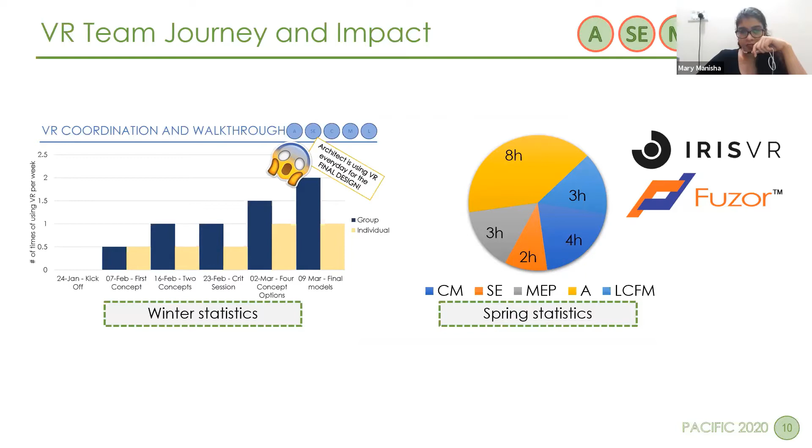Due to the universities being shut, a few of us lost access to VR headsets. Despite this, we used the computer screen version and did well in utilizing VR in comparison to winter statistics. We use VR to conduct walkthroughs with our team and also with our owners. More often, we used it in subgroup meetings to troubleshoot and solve problems and to explain and check the feasibility of our ideas.

Moving on from the team process, first thing we did was the analysis of the site. Our building is located on a site belonging to San Francisco State University and will accommodate their engineering department. In the bigger context, the site is located at the edge of the campus, right next to Lake Merced. Already while being together on site, we spotted a big opportunity to use the view to the lake as an advantage for forming our concept.

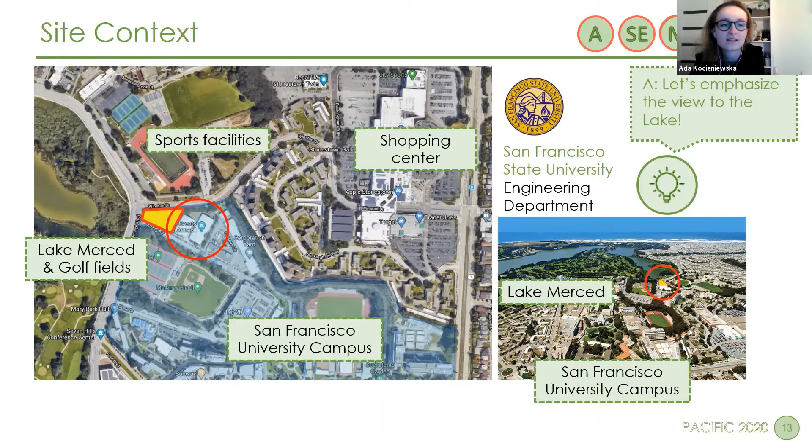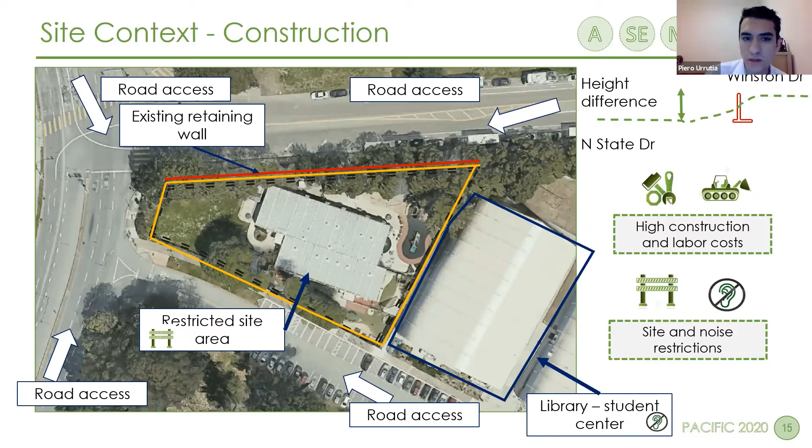In a smaller scale, our site is situated at the crossroad of the main street on the left, Lake Merced Boulevard. During our site visit in January, we discovered a missing pedestrian connection between Winston Drive and North State Drive. There's a height difference between Winston Drive and North State Drive, making the access to the site only possible from the North State Drive. There's also an existing retaining wall on site that we can take advantage of. Also, the Bay Area is characterized by high construction labor costs.

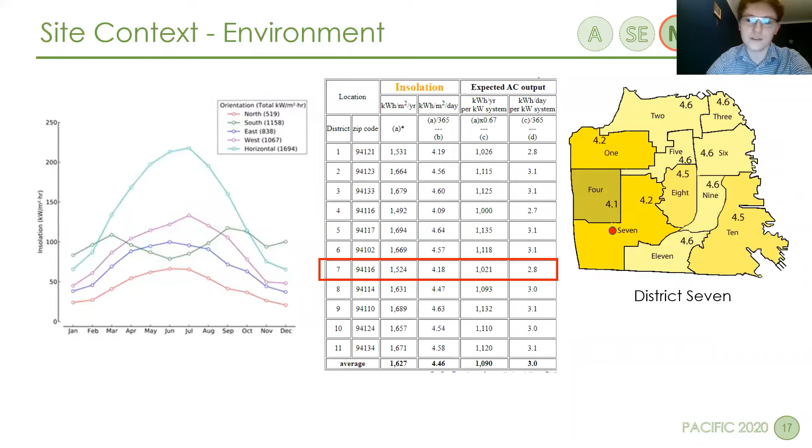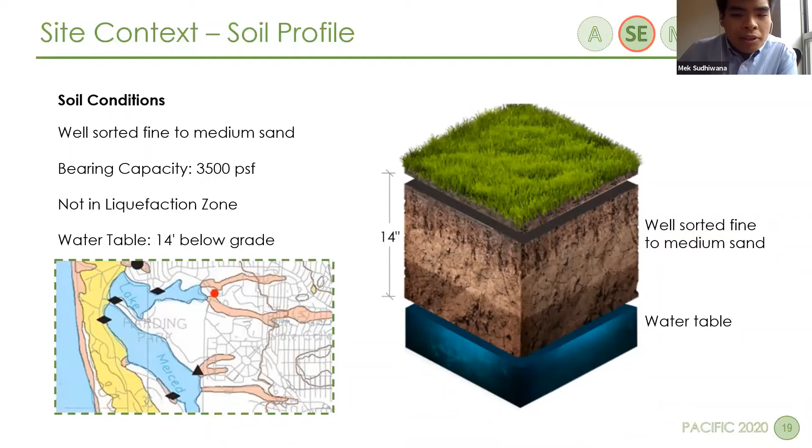Regarding the hazards that need to be mitigated, San Francisco's location along the San Andreas Fault means that the city is prone to earthquakes, and of course the structural system needs to be adapted to the seismic design requirements. As an educational building, which means that in case of failure the risk to human life is high, it is classified as risk category 3.

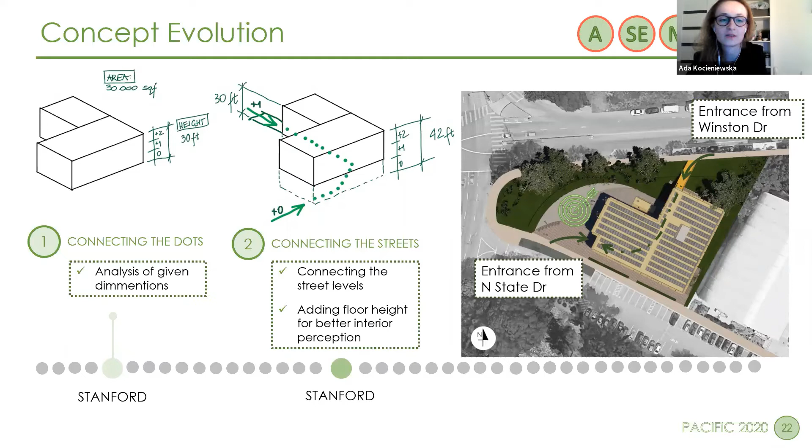The concept from the beginning went through an analysis and a set of changes from winter to spring quarter. The analysis that we did back in Stanford led us to first conclusions of how to connect the dots in order to answer the needs and opportunities of the given site. The first and inevitable connection appeared in the merge through the building between the opposite levels of the adjacent streets. It creates a possibility to increase the height of the floors to gain better interior perception. During the crit, we presented the idea of a kinetic facade for producing electricity from wind. This worked as an innovative idea, but the calculations revealed that this was a rather expensive high-tech solution that wouldn't create lucrative gain for the building and owners.

At the winter presentation, we presented two concepts, both of which represented our user-oriented design focused on using nature for sustainability gain. After the final choice, we made an evaluation of the best aspects of each concept to decide which ideas are the ones to further develop in the spring quarter. The development started with finalizing the input from every discipline to increase the sustainability as well as integration of disciplines in the design. The final outcome of our collaboration is presented in our integrated facade system that each of the disciplines contributed to.

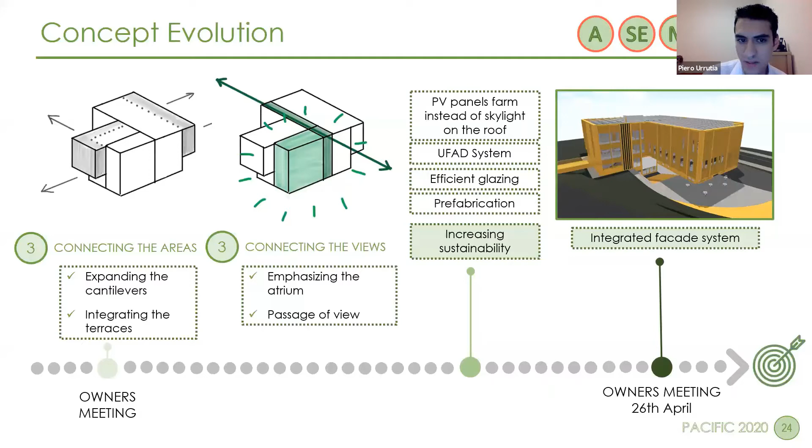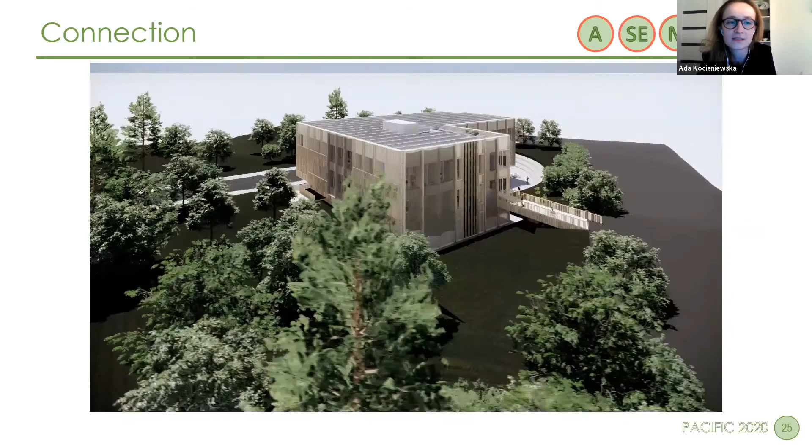Our final design presents an educational building with a user-oriented design that provides an innovative facility for the engineering department. The building corresponds to nature with green walls and blends in with the site due to the use of natural resources. The focal aspect that creates the form of the building is an integrated wooden facade that is crucial for harvesting water from fog and using it for operating the building. The building is accommodated to the sun directions, which creates a well-being atmosphere.

The goal of the project is to implement a user-oriented design to connect occupants of the building with the neighborhood community while designing the facility engaging the collaboration between people. The goal is to be flexible and prepared to adjust to the needs of the user. Nature can be interpreted either as a threat that needs mitigation or as an opportunity. Therefore, it is our goal to neutralize any threats posed by nature while taking advantage of what nature has to offer in a sustainable but also innovative manner.

Data is important for design, construction, and operation. It must be shared among all the disciplines in order to assure the integrity, accuracy, and consistency of it. The team has worked collaboratively in order to assure that the design is ready to be built, operated, and maintained.

The first goal that we addressed in the design was the connection to community, which puts the user on spot. Not only are we thinking locally of the users as university members, but also globally about the contribution to the surrounding neighborhood. To create a sustainable co-living community, the design supports and offers advantages to surrounding as well as daily occupants.

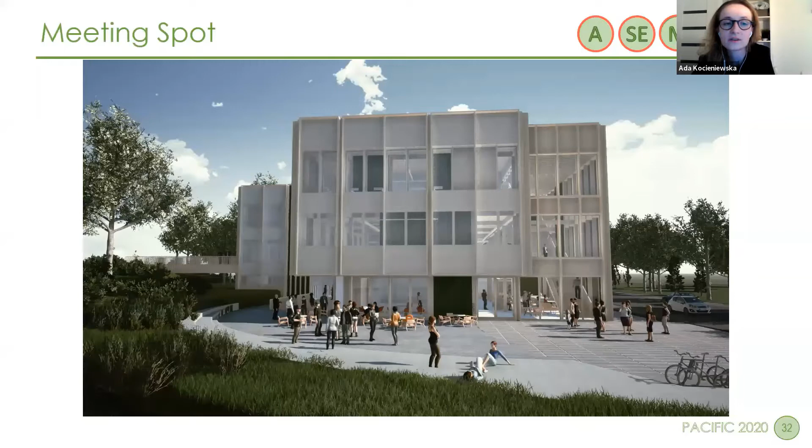We combine the needs of the occupants from owners and faculty's perspective and created a building that connects learning and innovation through collaboration. The day of the future faculty member starts when he enters the site through the main plaza. It functions as a meeting spot and the main outdoor public space.

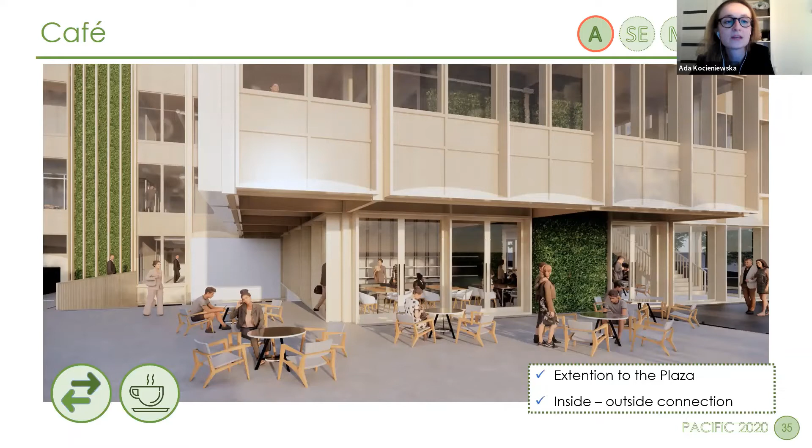Right after entering the building, we've designed a rentable area which can operate as a cafe. A cafe with 700 square feet enables the public to use the building and to gain additional income. During warmer days, the cafe has a possibility to open up to the plaza as an extension of rentable area that connects it to the public space and outdoor meeting spot.

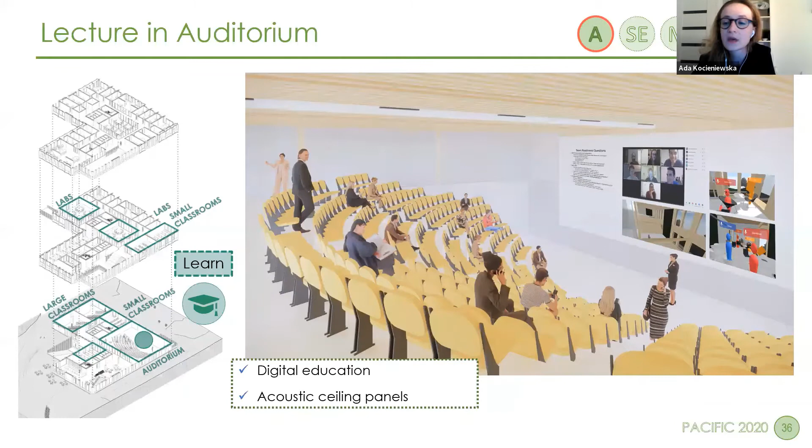The route for the building follows to the auditorium that accommodates the lectures, and it's the biggest area of the building. Additionally, it can be used as a rentable space. The clear visibility is achieved by the terraced audience. Displacement ventilation located on 2 levels was designed to get high thermal comfort in the auditorium. The supply ducts and fan coils are located under the raised floor, while exhaust ducts are placed near the ceiling along the beams.

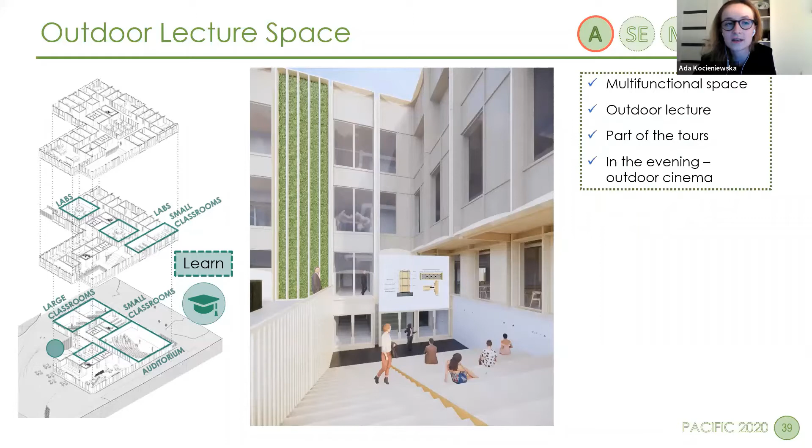The design gives an opportunity to have an outdoor lecture space with the possibility to hang the projection screen. The location of the screen is the most shaded from all the facades, so the lectures can take place both during the day and evening.

Another space that functions as a lecture space are the large classrooms. The same spaces are used here as a rentable area for events and are designed to be prepared for the unexpected. Last month changed the perspective of resilience of the facilities into a whole different picture. As a response to a possible pandemic that might happen, our building plays the role of shelter for the neighborhood, for which the classrooms can be used due to retractable seating.

The advantages of the building for giving shelter are the availability of a kitchen and bathroom facilities, sensors in the building to measure and adjust the air quality, and the building management system which allows to separate the airflow from other spaces. With the fog catcher and the combination of PV panels and Tesla batteries, we can always provide water and energy, also during lockdowns.

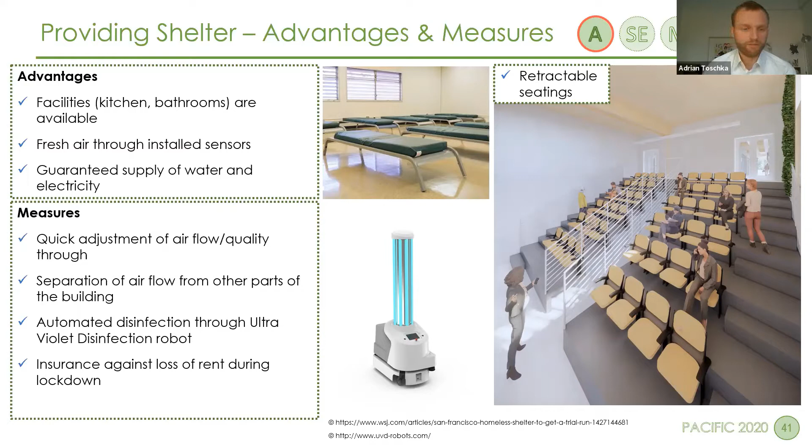To keep the users of the building healthy, we are using an ultraviolet disinfection robot which disinfects the building also in normal waves of influenza. During possible lockdowns, we are insured against the loss of rent. The idea of preparing the quarantine separated from the rest of the building is supported by the fact that both large classrooms could be operated only by the external staircase and at the same time be disconnected from the rest of the building.

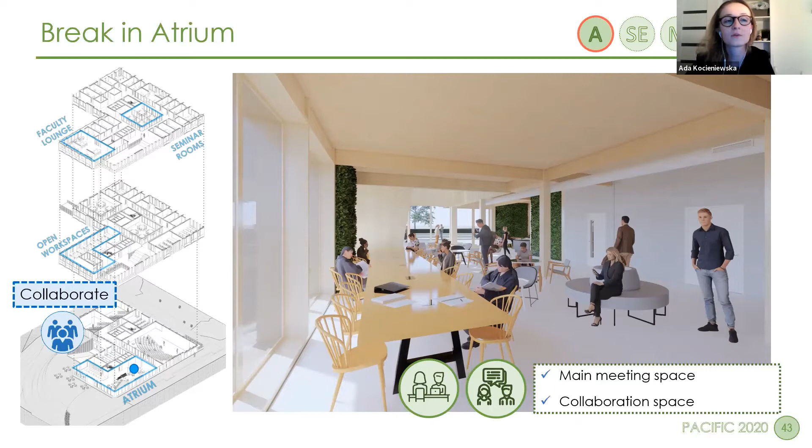Afterwards, we enter the atrium, which is the central place of the building. Not only does it enhance the social connections, but it also could be used as informal collaboration space for individuals and teamwork. The focal point of the atrium is the staircase that is essential as a viewing spot to the Lake Merced nearby.

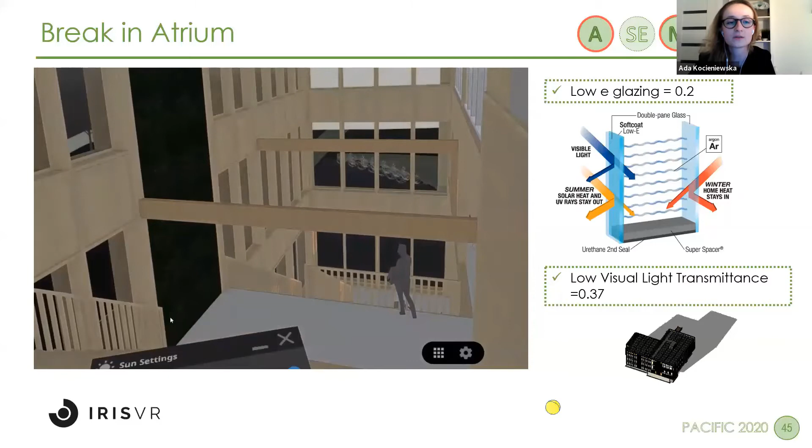To emphasize the atrium from outside and the view from inside, we designed the facade as free from any shading system. To prevent the users from glare effect and overheating, we improved the windows to low E double glazing with a low visual light transmittance. The sun simulation presents how the gray tinted windows stop part of the sun rays from passing through the glazing.

The building is designed to provide not only educational spaces like classes, but also additional areas for collaboration. The western wing of the first floor is fully designated to students' collaboration. It offers multiple options of workspaces, from individual spaces integrated in the facade, through shared team tables, and assigned meeting and conference rooms.

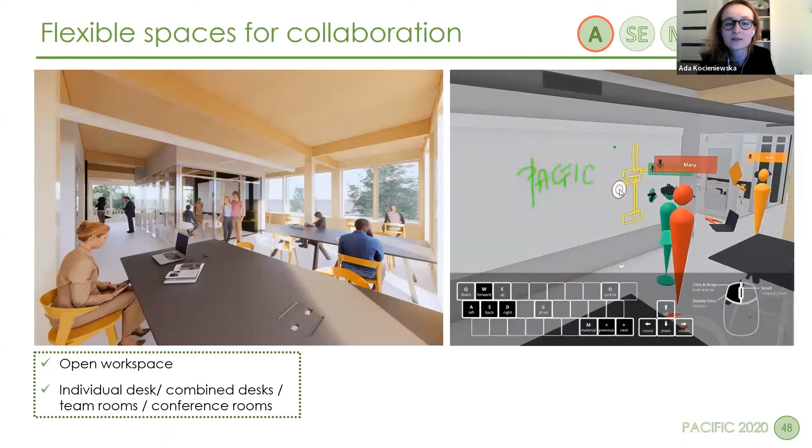The communication area is included as an activated stand-up brainstorming spot, which we checked in VR for our sessions. The emphasis on collaboration in the building is encouraged by the arrangement of spaces. The flexibility to rearrange the seminar rooms from 1 to even 4 makes it possible to adjust them to the current needs and increase the area for usable space.

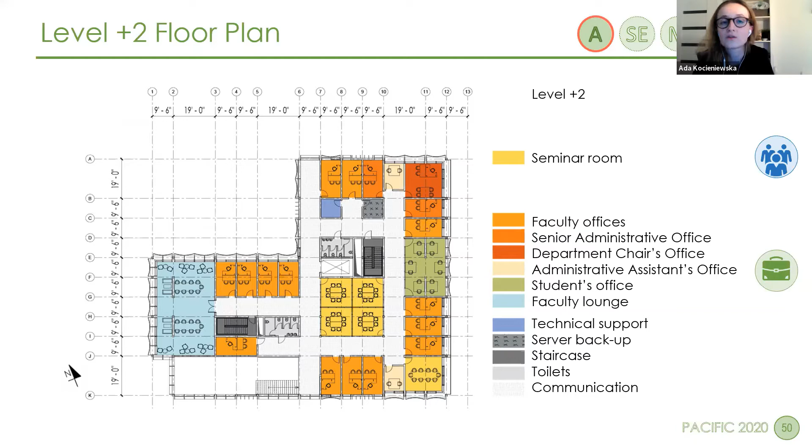The building is designed to enable the connection between students and faculty members due to the mixing of faculty and student offices on the first and second floor. The offices are treated with high attention due to their air and sun conditions. The sun is limited from overheating the rooms due to the setback of the facade and a natural passive cooling system. Additionally, the building is using underfloor air distribution to enhance flexibility of spaces and temperatures.

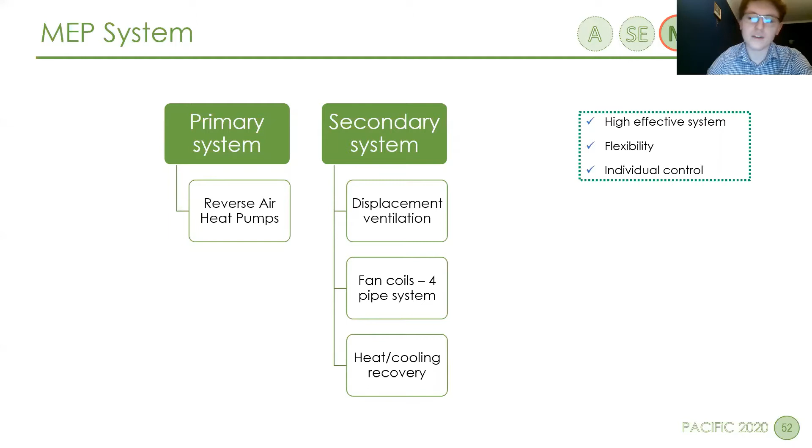To design a building with high efficiency, we also need an efficient ventilation system. For the primary system, we have the reverse air heat pump, while for the secondary system, we have displacement ventilation with fan coils, a four-pipe system, and a central air handling unit with heat and cooling recovery. The reverse air heat pump was chosen because of its ability to efficiently heat and cool the building by only changing the flow inside. It also does not emit any CO2 and has low operating costs because it is powered by our PV panels.

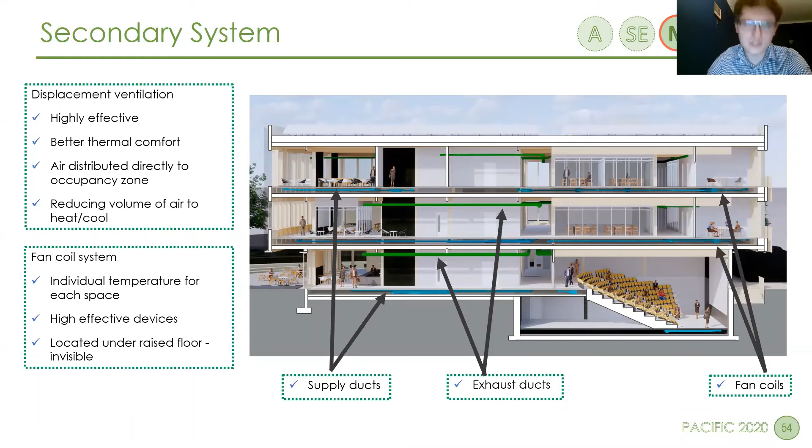The benefits of our secondary system are that it can provide an individual temperature at each space, which can be controlled by temperature and CO2 sensors, which can reduce heating and cooling loads because air with the desired temperature is distributed directly to the occupant zone.

The second objective of our design is the connection to nature, by creating a structure that is able to recover quickly from natural hazards, but also a building which benefits from what nature has to offer. So, addressing the earthquake challenge, we need to control our structure's response to it, and at the same time minimize repair and downtime costs. Therefore, the team aimed for a resilient but also sustainable structure. Glulam columns and beams form the structure's framing system, which is supplemented by CLT panels with 1.5 inch of gypsum topping as a fire protective layer. Moreover, CLT rocking walls are used as the lateral resisting system.

So in order to understand how the rocking wall system is related to resilience, let's first explain its basic mechanisms. During an earthquake, the wall rotates but doesn't bend, and thus the damage on the wall is minimized. However, the damage is still there, but is confined to replaceable Krawinkler fuses, which provide the ductility to the system and the resilient characteristic, making the building serviceable after an earthquake event. The self-centering capability is provided by the post-tensioned steel rods, which extend the entire height of the building. Since the damage is concentrated in the fuses, the rods remain elastic during the rocking motion.

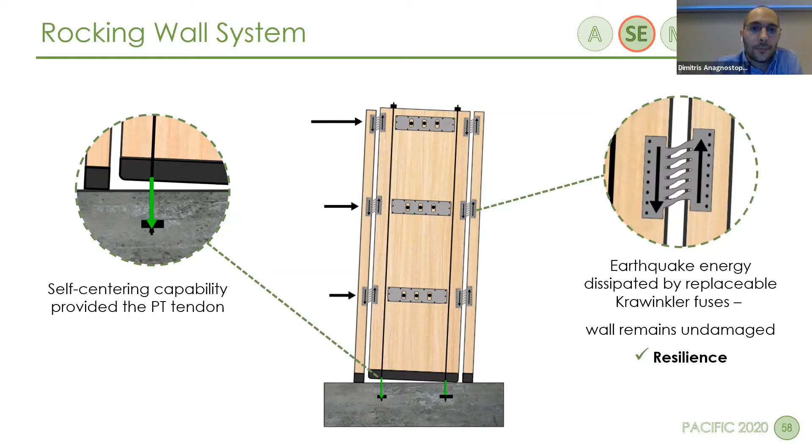The connection to the diaphragm and also the shear transfer is implemented with round pins, which are connected to the CLT panel at each level and extend until the surface of the wall. As the wall rocks, each pin moves in the vertical direction inside the slotted hole. The dimensioning of the slotted hole depends on the maximum vertical displacement of the wall during an earthquake, and it's attained by the nonlinear dynamic analysis, which will be introduced later.

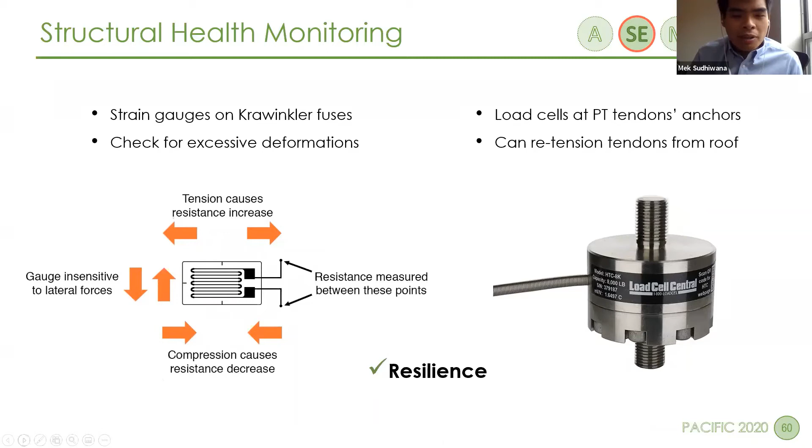To further improve the rocking wall's resilience, the team will be implementing structural health monitoring by placing strain gauges on the Krawinkler fuses and load cells at the post-tensioned tendon anchors. These devices will be connected to a central system and a digital twin, which will be explained later. This allows operations and maintenance to know when to replace which fuse and if a tendon needs to be retensioned.

We are transferring the biggest natural hazard of seismic activity with landlord insurance, and we discovered that to get this type of insurance, it's mandatory to have the rocking walls. Our landlord insurance covers the costs for reconstructing the building after an earthquake up to $5 million, and it also covers the loss of rent during reconstruction.

Since we have a restricted site, the use of mobile cranes is not possible. Hence, we have evaluated 2 cranes for our site, the tower crane and the crawler crane. The final decision leads to the use of the crawler crane because it is more flexible, easier to install, carries more capacity, and it's movable, especially for the installation of the rocking walls. Since they come full height, 42 feet tall, the tower crane must be at least 100 feet tall, whereas the crawler crane with the luffing jib doesn't need to extend its boom or jib length.

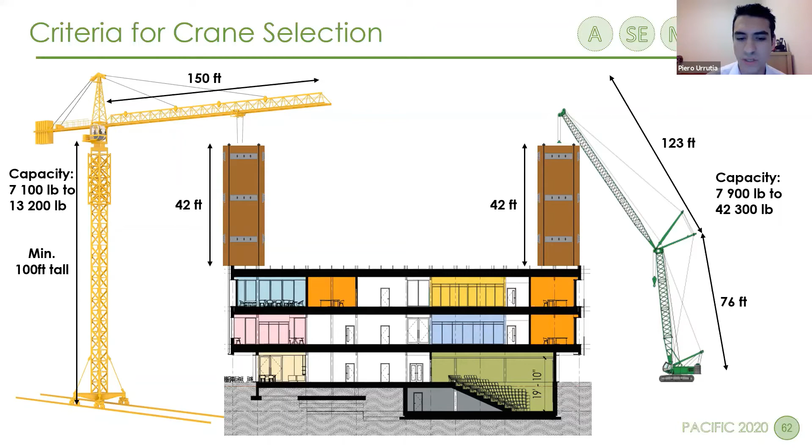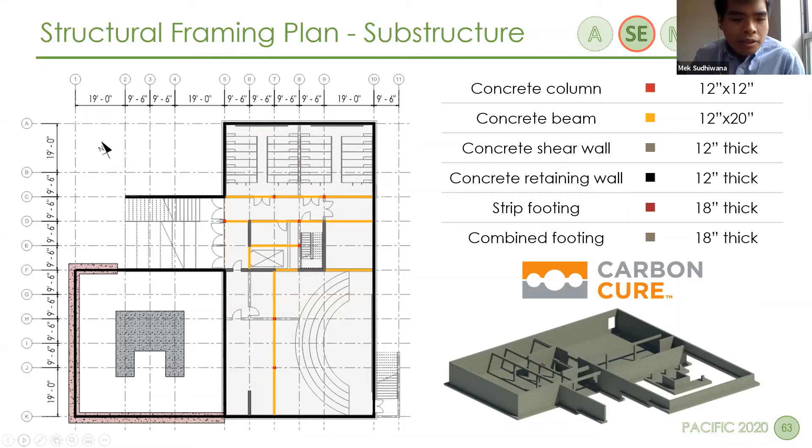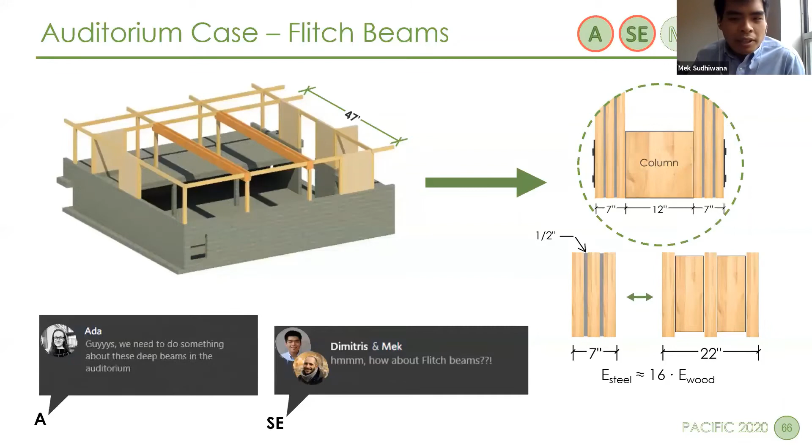Here's the structural framing plan for level 0. The SEs and CMs collaborated with the architect early on to have regular grids and standardized structural members. The largest challenge on this level was the 47 feet span of the beams above the auditorium. And the team's solution was to use flitch beams and double beams. The steel plates increase the strength of the beam, while the wood prevents the steel plates from buckling. And also having the double beams reduces the load carried by each beam.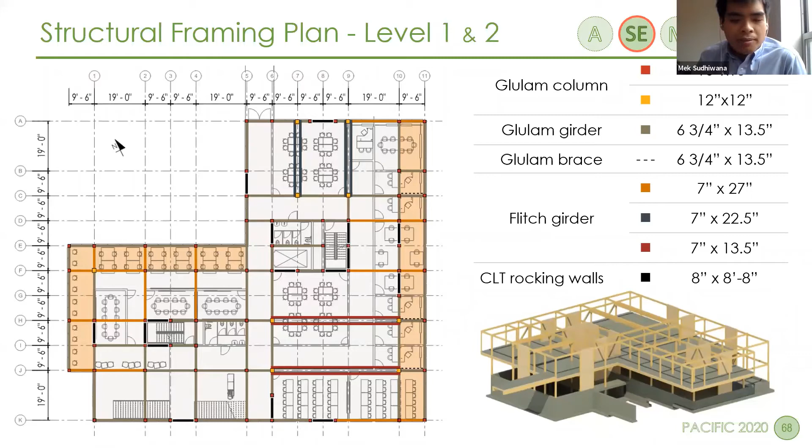As said before, SEs and CMs have collaborated with each other in order to design for constructability. This is shown on the standardized structural members selected. In addition, we have optimized the layout for the CLT panels, in which we have only 4 different sizes. This has been possible due to the standard grid size from the very first concept.

Here are our typical connections. We're using a concealed knife plate for beam-to-beam and beam-to-column connections. Not only is the concealment beneficial for aesthetics, but it's also good for fire protection. For the column-to-column and column-to-concrete connections, we're using Rothoblaas's pillar. And unlike in the detail shown here, chemical anchors will be used for the column-to-concrete connection.

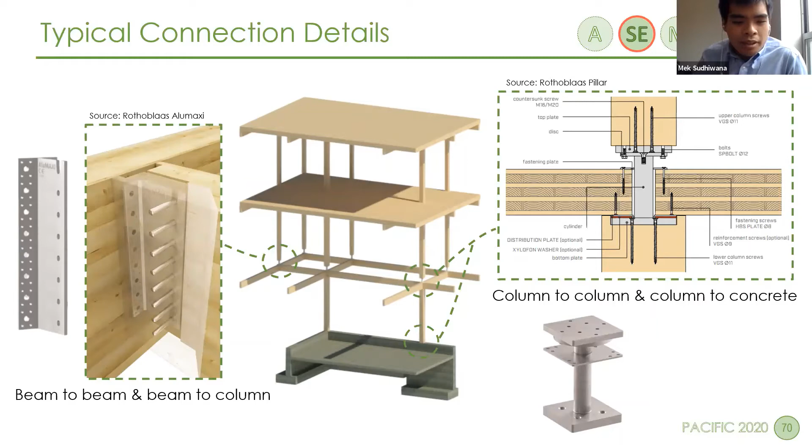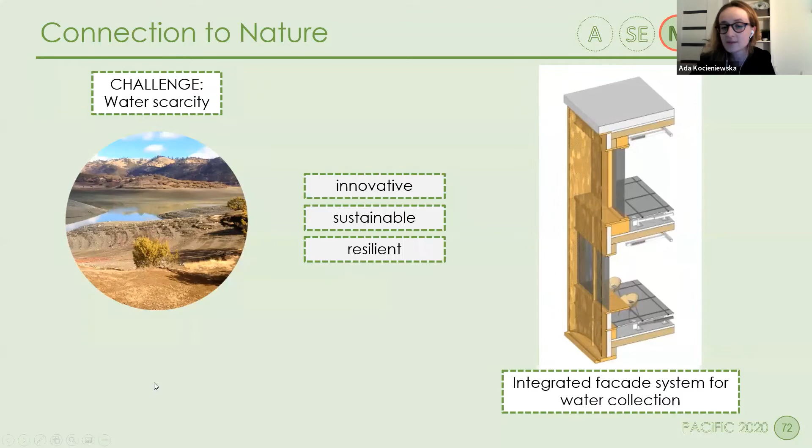Due to the fact that water scarcity is a rising problem in California, we have introduced systems that support production of water from one of the most common phenomena in San Francisco, which is the fog. Our design is enhanced by the fog catchers integrated with the facade. Based on the study of a research group at MIT and the fog collector producer from Germany, we've decided to use a polyethylene mesh.

The research group proposed an efficient system from stainless steel, but though it was more efficient in terms of water harvesting, the cost of production and much higher weight disqualify it from being a better option in the long run. The water is collected on 2 layers of the woven mesh covered by substances that firstly ensure that small droplets easily slide down into the collecting gutter integrated with the facade mullion, and secondly, prevent the mesh from being covered with microorganisms.

The irrigation system is attached to the columns of the facade and brings the water through pipes to 2 water collectors located underground on site. Due to maintenance, the fog catcher modules are clipped into the modules of the wooden facade and are mounted with profiles. The windows behind the fog catchers are openable to enable cleaning.

A majority of fog catchers are located on the west and north facade because the wind can increase their efficiency. One of the biggest advantages of the fog is that it occurs almost every day during mornings and afternoons, so our device can work for the whole year.

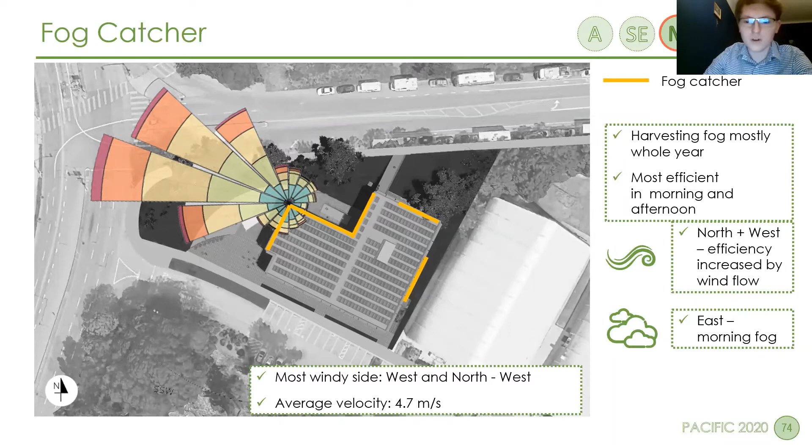The adoption of the fog catcher idea combined with rainwater and greywater collection allowed us to reduce water consumption by 80%, as the fog catchers were able to collect more water than both rainwater and greywater collection. The fog catcher can be used not only for harvesting the fog, but also as a shading system.

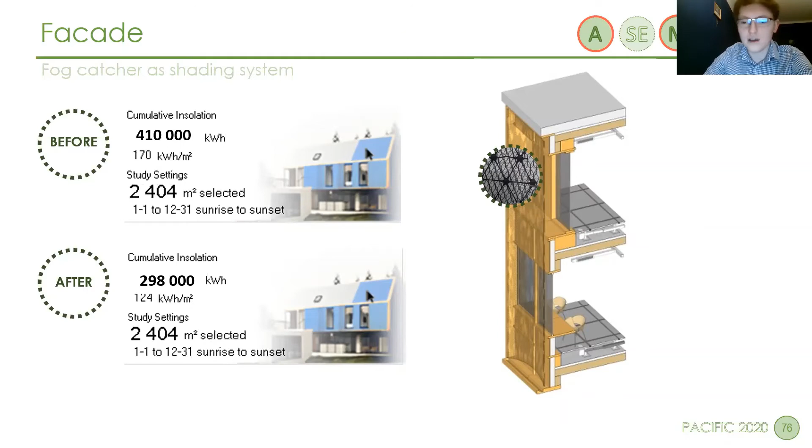We performed an analysis which showed that the system allowed us to reduce the insolation in our building by 27%, which greatly helped us reduce cooling loads. To provide building efficiency and choose the most prominent placement of the shading system, we did a shading analysis which shows that the most sunny facade will be located on the south side.

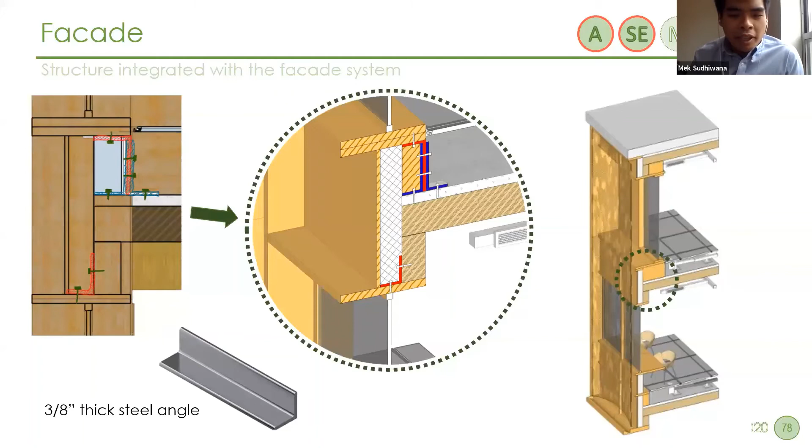To reduce the sun's impact on the cooling load and also to prevent glare, we chose glass with low-E and visual light transmission value on this part of the facade. During the subgroup meeting between the architect, SEs, and CMs, a connection detail for the facade modules was prepared in a way that is structurally sound, easy to construct, and does not negatively impact aesthetics. The blue elements were initially attached to the structure, while the red elements were initially attached to the facade module.

The installation of the facade will consist of having first the structure ready, then the installation of the facade modules, and then after that, the facade is installed on the floor below and the floor above. We can install the facade finish in between the floors. Finally, the fog catching net is attached and clicked into the facade.

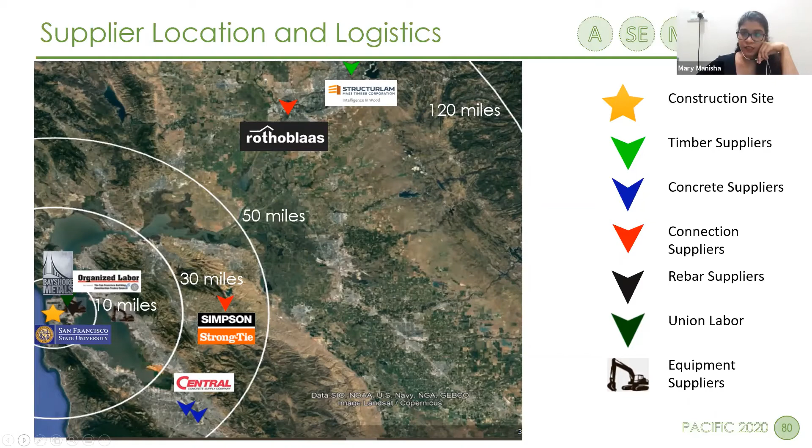Considering the structural system of the building, the following suppliers have been identified, and the raw material timber would be sourced from Canada, whereas the connections would be mainly from Italy. We then evaluated the possibilities of prefabrication with 3 elements. The facade module with the fog catcher was a major component, but the risks associated with this were very high. Due to the combination of fog catcher and the facade, there were waterproofing issues and rework necessities.

The whole structure is made of industrialized glulam beams, columns, and CLT panels, as explained earlier. They have been made to standard sizes wherever possible, which led to the optimization of freight, thereby leading to lower emissions. These industrialized panels are pre-assembled at site with the connections. The risk associated with fire rating is mitigated by using fire rating paints, and the risk of phytocontamination during transportation is mitigated by individual packing and by using a hydraulic boom or pressure wash.

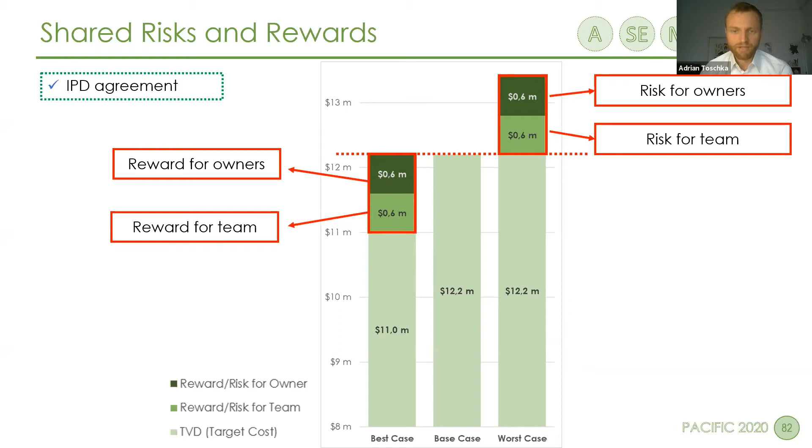Installation of bathroom pods is cost neutral, but has a higher risk with regards to MEP flooding and earthquakes as the structure has a raised floor system. Due to an IPD agreement, we implemented a risk and reward concept regarding the target construction costs from the TVD. The graph shows that we share a reward of $1.2 million with the owners in the financial best case scenario, respectively a risk of $1.2 million in the worst case scenario.

To track the prefabricated components, active RFID tags were installed at the fabrication yard after the quality testing of elements. Then the data is mapped. These are geotagged to enable logistics tracking, and after arrival at site, these are inspected and quality checklists are tagged, and data is stored and used to track materials to enable just-in-time deliveries. It also enables an efficient billing system.

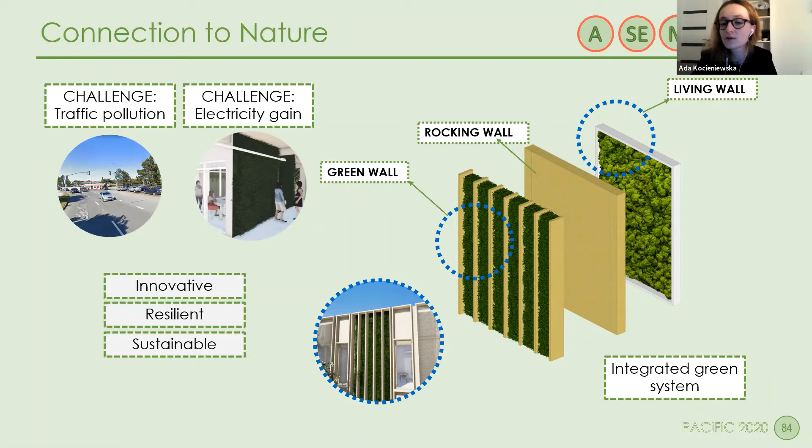To face the challenge of polluted air next to our site caused by traffic, we introduced an inside-outside integrated green wall system based on the rocking walls designed on the perimeter of the facade. From outside, it cleans the polluted air and contributes to decreasing the amount of CO2 in the air. It is watered by moisture and humidity of the air. From inside, the system is covered with living walls. From photosynthesis of moss in specific soil conditions that enhance the harvesting of electrons, it generates electricity for plug load.

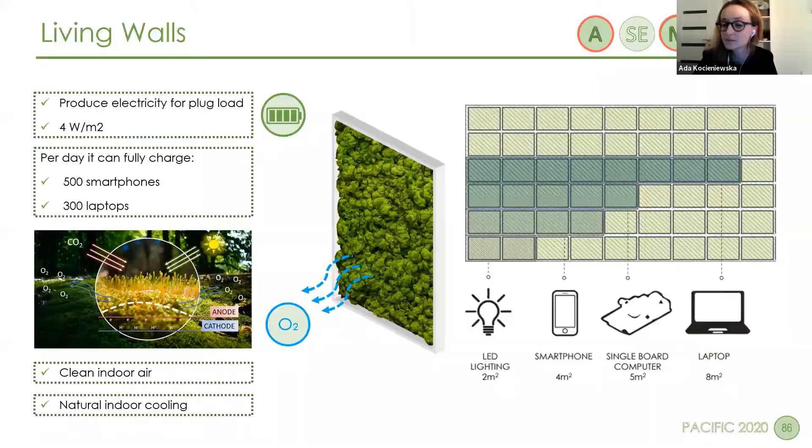Based on the average capacity of the battery and its need for power, we calculated that the amount of living walls in collaboration spaces lets us charge either 500 smartphones or 300 laptops a day. Apart from generating electricity, the system creates pure air conditions as well as natural cooling. To fully use the natural resources given on site, we also want to use solar energy. To do this, we designed a PV farm on the roof.

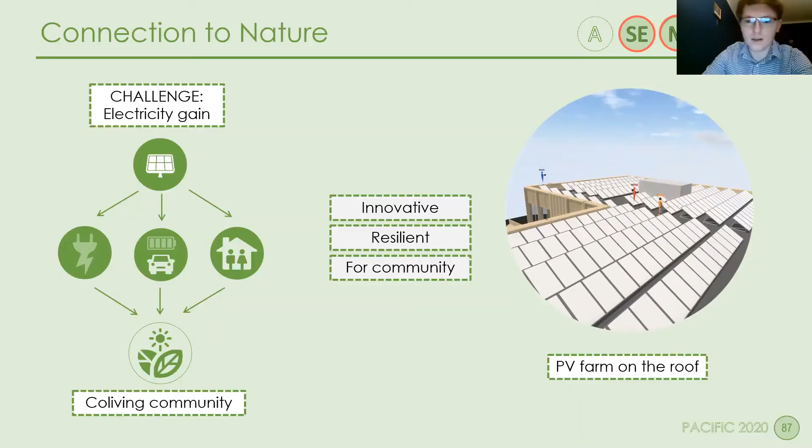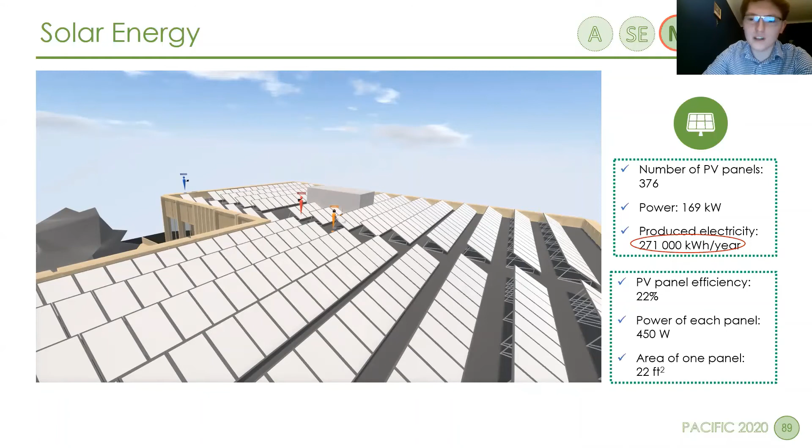To choose the proper location and orientation of the PV panels, we made the solar analysis in Revit. According to this analysis and diagram of insolation, we located PV panels on the roof and oriented them to the southwest direction. As we can see, the roof has enough space for 376 high-efficiency panels with power of about 170 kilowatts. For the whole year, it can produce about 270,000 kilowatt hours.

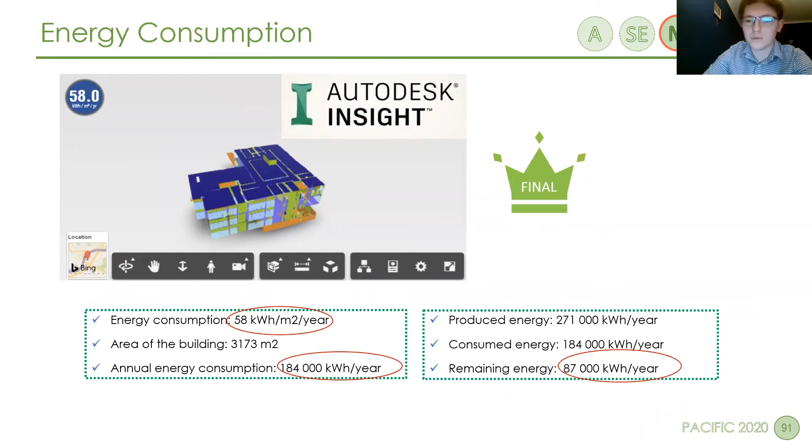Comparing that to the amount of energy produced by the solar panels, we are using 32% less energy than we are producing. But what to do with the additional energy? Our proposition is to give one part of it to the university community as free energy for charging electric cars. It can encourage people to change their vehicles to greener ones, which will be a climate-friendly process because of less CO2 emitted to the atmosphere. The rest of the extra energy will be given to the neighborhood in case of blackout.

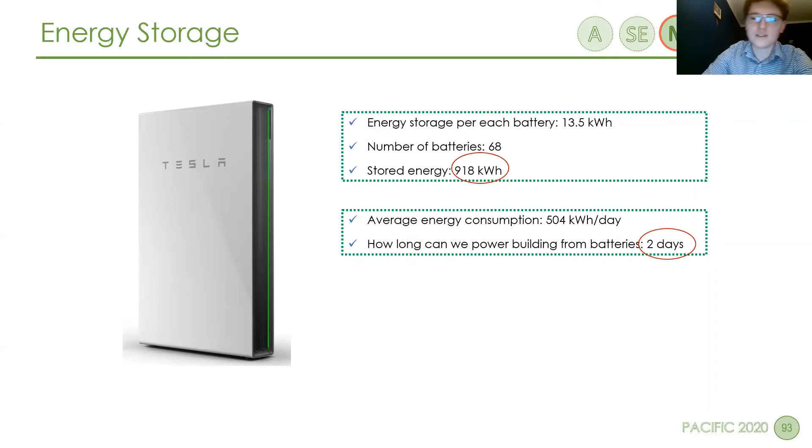Since our building is only using energy that we produce, there are concerns about if the panels get damaged. To address this, we have Tesla batteries in our building that can store enough energy for about 2 days, which will be enough time to fix the PV panels.

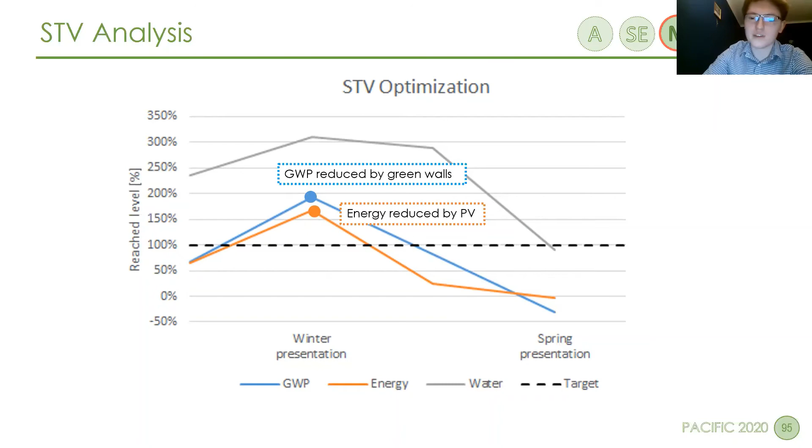Finally, we can perform our STV analysis. Our team met every target and we're able to reduce our water consumption by 80%, which is very good with the water problems in California. We're also able to have our building be carbon and energy negative. Here, we can see the history of our STV analysis. As mentioned before, water is our largest challenge, and we're able to improve every category by using nature, rainwater, solar energy, and moss in green walls.

However, we also want to give the owners the possibility to assess the different concepts with intangible aspects in the value for money analysis. In this value for money analysis, the first 4 rows show intangible assets of the different concepts. To relinquish the PV panels, batteries, and fog catcher would mean to lower the service for the public, to have a low educational purpose, and to be less resilient.

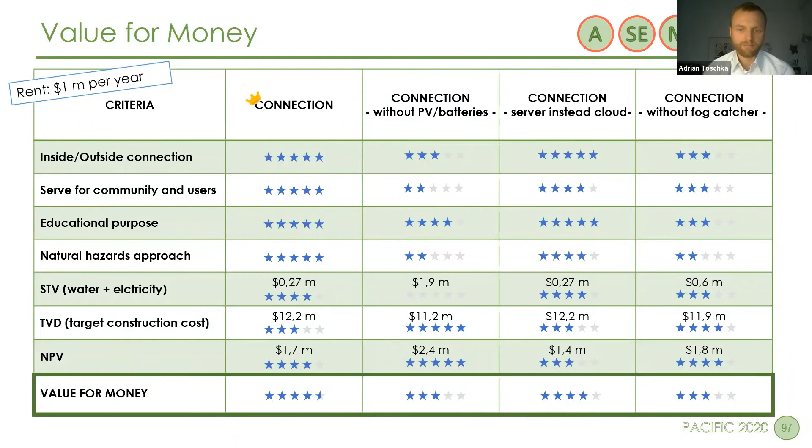From a quantitative point of view, especially the relinquishment of PV panels and batteries shows a huge contradiction with having the lowest initial costs, but at the same time the highest STV in terms of need of electricity. In conclusion, the building with PV panels, batteries, fog catcher, and cloud service has the highest value for money, considering tangible and intangible assets. Data is used across all the disciplines and will become an important aspect for the use of the digital twin.

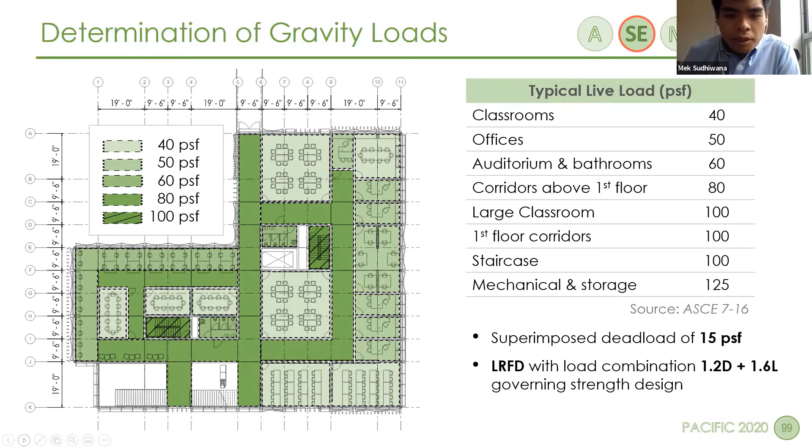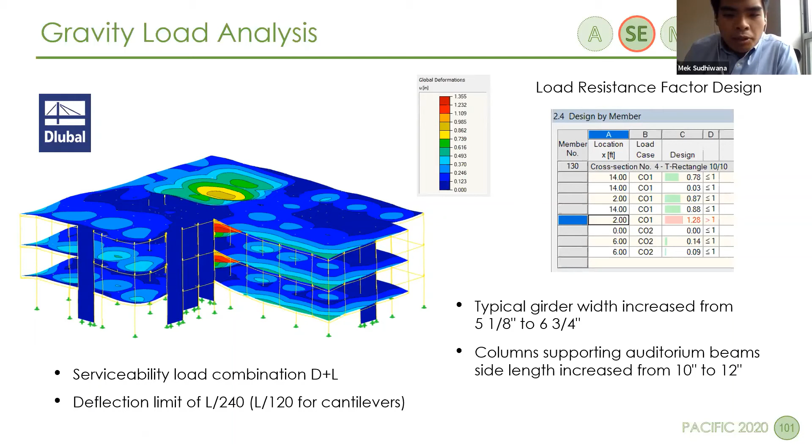The structural analysis and design of the building, apart from the rocking walls, was done in Dlubal's RFEM, a 3D finite element analysis program. The team verified that there were no serviceability issues based on the deflection limits from the IBC and used the load combination dead load plus live load. The strength requirements were checked using LRFD and resulted in the typical girder width increasing from 5 1/8 inch to 6 3/4 inch. And the side length of the columns supporting the auditorium beams was increased from 10 inches to 12 inches.

The results from the modal analysis showed that in the first two modes, the translational modes are the fundamental ones, whereas the third mode is torsional. A low-rise building like our structure experiences mostly the first two modes, therefore the location of the rocking walls strengthens

the building's torsional resistance. Here you can see the lateral load path of the same frame. The load creates a tension load to the external right columns of the frame, then it's transferred to the rocking walls and columns and ends up to the foundation.

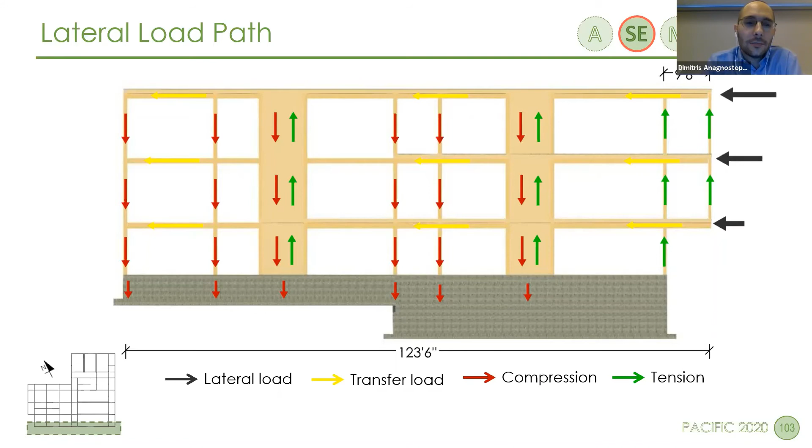For the tendon, first we created a material with a bigger elastic region than the fuses and then simulated the tendon as a load. Regarding the uplift movement, a gap support element was used, which is very stiff in compression but has no stiffness in tension.

The nonlinear time history analysis was implemented on the southern frame of the building. For that, 7 ground motions were selected and scaled according to the design response spectrum obtained by the site class and the risk category of the building. The procedure on selecting the appropriate ground motions for this structure was based on the fact that low-rise buildings are affected more by earthquakes with maximum acceleration at high eigenfrequencies.

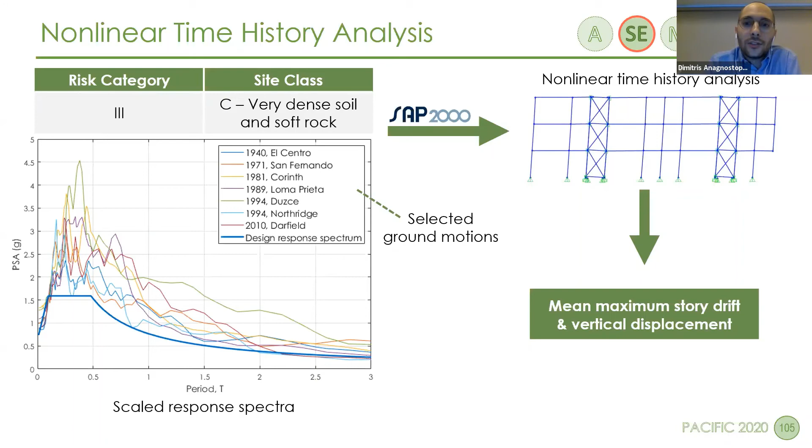And in this video, we selected to show the Loma Prieta earthquake and the response of the southern frame, including 2 rocking walls. Here, the rocking motion of the wall is visible. And as you can see, the maximum displacement is noticed on the top right node, and it's 3.75 inches.

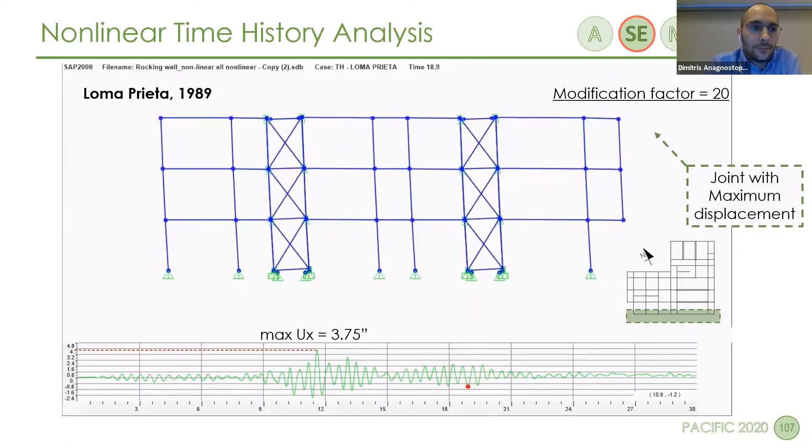We have used an SL framework in which we review the planned schedule that ALICE creates with a logistics model in Fuzor. This framework helps us identify the bottlenecks and reduce the potential risk of having delays during construction. ALICE helped us identify the maximum crews that the project can have. If we decided to have more crews than that, the project duration won't be affected. This is called the infinite resources.

However, because of labor and the space constraints, there is a practical maximum resources that the project can use. We have selected a schedule with the practical maximum resources in which the project duration is 246 days and the total construction cost is 12 million.

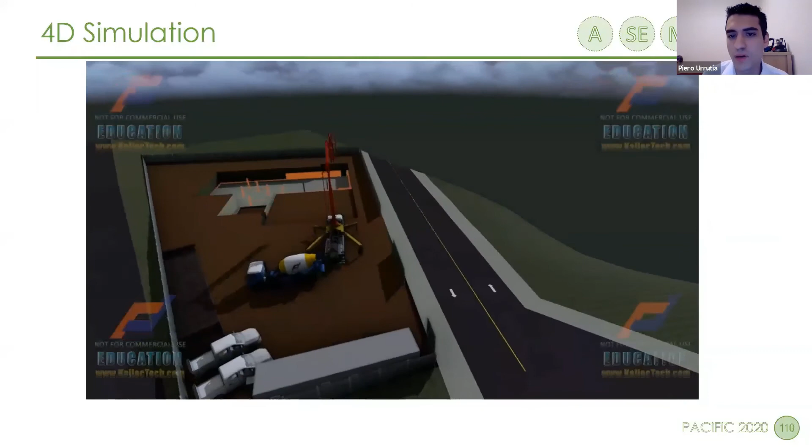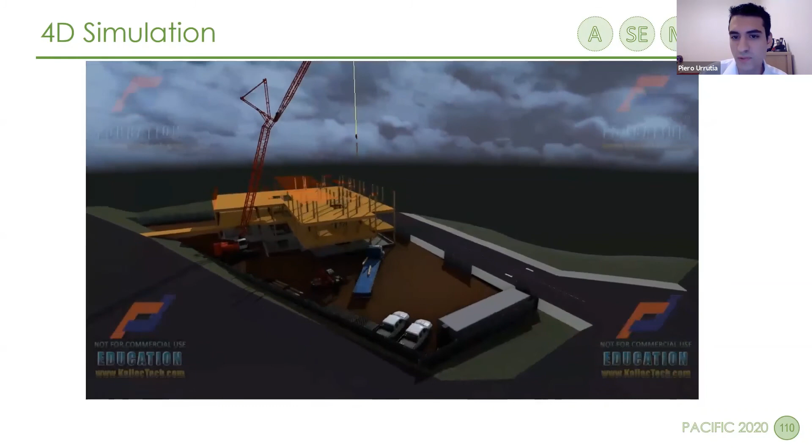With the results of ALICE, we have modeled a 4D simulation, including logistics. In this simulation, we show how the building is built and what equipment is required at what time. It also shows if there will be any conflict between equipment. The simulation has shown us if it's feasible to install the crane and also the maximum length of the truck that can enter the site.

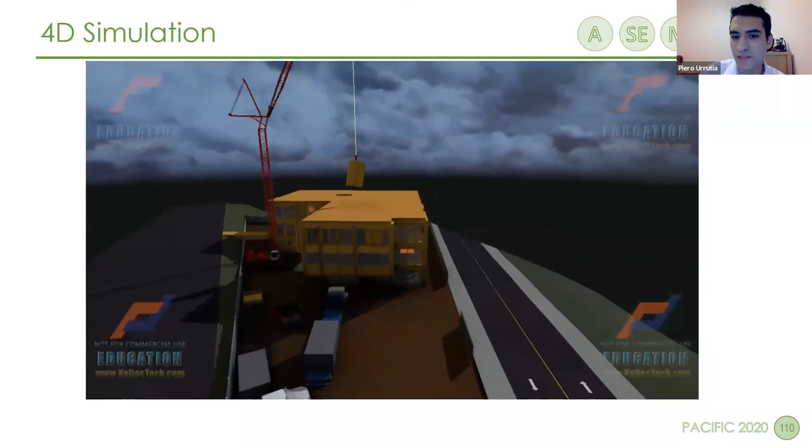The main equipment is the crane, which is used since erection of the level 0 until the installation of the facade. Trucks come and go, delivering materials such as columns, walls, beams, and slabs. With the results of ALICE and the 4D simulation, we have identified a logistical bottleneck.

In this simulation, trucks are delivering the facade modules and interior work materials. For the crane to always be working, there will be facade modules on the material laydown area when the trucks carrying the facade are not on site.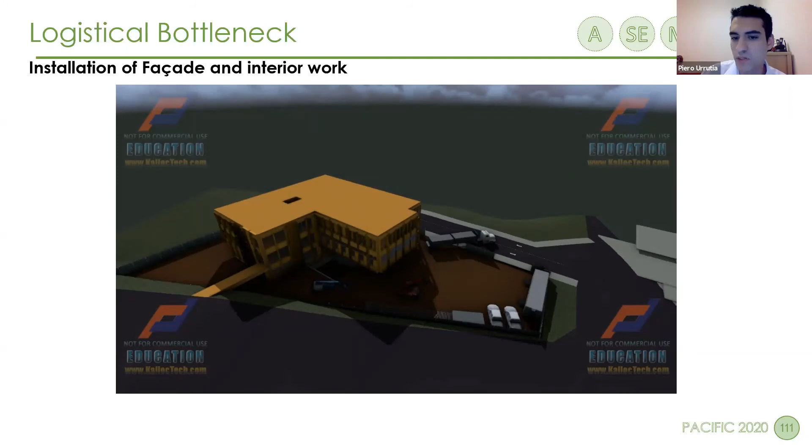Besides this, after the installation of the facade module, there is a facade finish that must be done with the telehandler. However, because of the space constraints between the telehandler and the crane, this must be done at the end of the installation of the whole facade, where the crane is dismantled and carried out of the site. When the truck with interior work materials comes, the telehandler must move to another position.

As we have seen in the logistical bottleneck, the practical maximum resources would cause delays from a logistical point of view. As a result, the duration will not be as expected. We have decided to take into account those delays and use a less aggressive schedule.

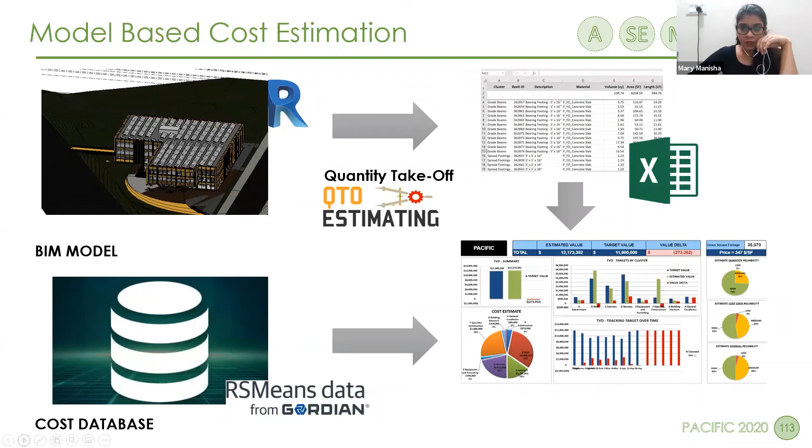The result from this is a project duration of 300 days and a total construction cost of 12.2 million. We used a model-based cost estimation to obtain and update quantities according to the model, and then used a unit cost database to link the quantities to the prices and finally create the cost estimation. With this data, we use the TVD spreadsheet to keep track of our targets and also make updates to the design according to the TVD.

A cost tracking is illustrated here. Initially, the cost estimations were based on both the model and a few assumptions. By 23rd Feb, we managed to estimate it based on the model, thus increasing data reliability. But a week before the winter presentation, as explained earlier, we scrapped our wind facade idea and replaced it with a fog catcher facade. By the winter presentation, we increased the area of facade, which resulted in a rise in total costs.

We then started to evaluate different options for the facade, whether to have it as a standalone option. Then a final decision to integrate the fog catcher with the facade was taken, and the rocking walls were converted to green walls, thus resulting in a surge again. Later, Tesla batteries were added to meet our project's goals of giving back to the community and connecting to nature, resulting in a final estimate of $12.2 million.

Major cost fluctuations were observed in shell, services, and specialty construction categories. Shell costs were increased when compared to the winter presentation due to the evolution of our design. There was a rise in services costs due to the addition of Tesla batteries and the setup. Specialty construction costs surged due to the conversion of rocking walls to green walls and due to the fog catcher facade. All these resulted in us exceeding our target by around $300,000, which still makes the project profitable in the long run, as it would reduce life cycle costs, especially water and electricity.

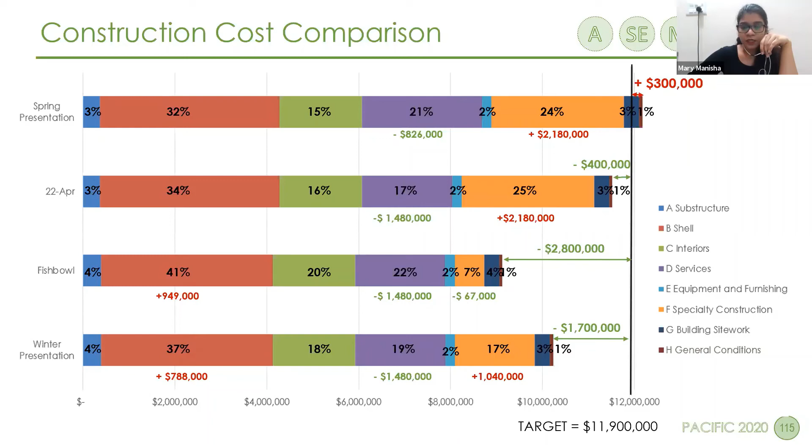To sum up our work, we would like to show that our building scored 81 LEED points and earned the LEED Platinum certification. It means that our building is friendly for both its occupants and environment.

Other risks than the before mentioned CapEx overrun, for example, act of nature, liquidity, construction, or operation and maintenance risks, are addressed by different risk strategies. The main risk measures are avoiding by using software or fixed interest rates, transferring by using insurances or obliging construction companies to take the responsibility for specific risks, and mitigating by the use of a digital twin of the building. The right bubble graph shows the effectiveness of our risk management, and only the risks we are responsible for.

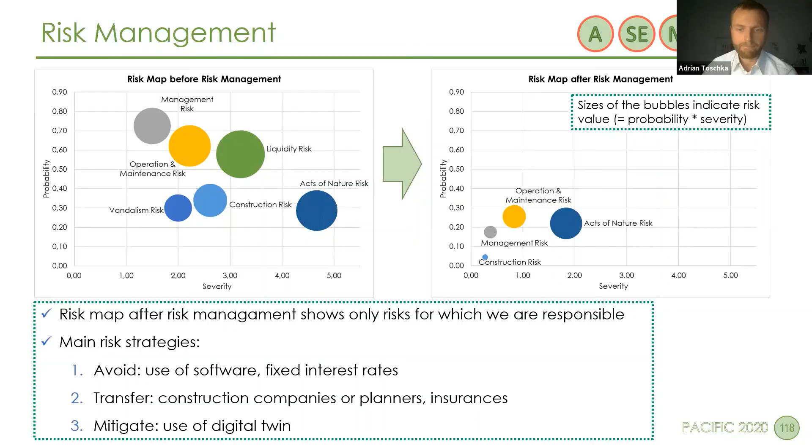We've prepared a summary of challenges addressed in this year's edition. We are answering the resilience challenge with multidisciplinary solutions that create a building ready for the unexpected. We collect the natural resources given on site, we store them, and we share them with the users and surrounding community. Through the structure resilient to earthquakes, thanks to rocking walls and sustainable materials such as CLT, we create a shelter in case of an earthquake, and together with the green walls integrated system, we reduce the CO2 footprint.

To answer the demand of the water shortage, we collect water from fog and rain to reuse it in the building. The PV farm on the roof creates a possibility for us to be sufficient for the energy needs of the building, as well as to support the neighborhood in case of a blackout. In case of an unexpected pandemic, the building is designed to be a shelter to support the nearby community.

Our financial resilience is shown by calculating the covenants: loan life cover ratio as the ratio of cash flow to outstanding loan, and the debt service cover ratio as the ratio of cash flow to debt service. In the graph at the bottom, the minimal values for the requirements of the PPP contract are indicated by the two straight lines. The orange and green lines for loan life cover and debt service cover ratio show that we never breached the covenants during the whole lifetime of the building.

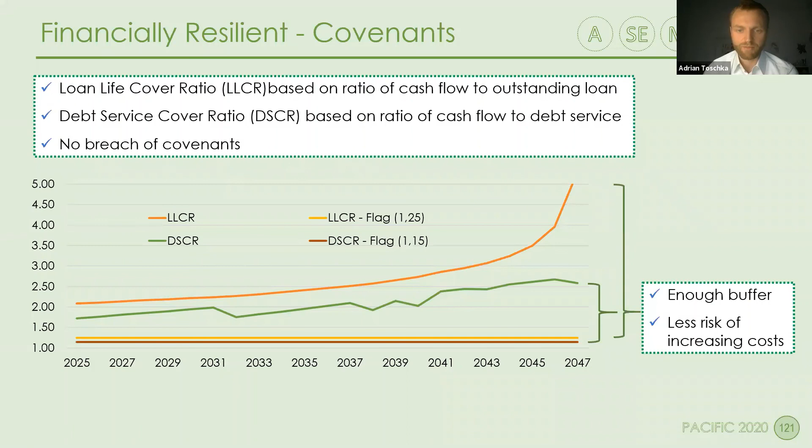After considering the risks and rewards, we decided to install the fog catcher separately and to pre-assemble the facade assembly module, thus mitigating all major risks. Anchors would be provided at required locations and the fog catcher will then be installed. The pre-assembly of the structure will be carried out, and it was decided to not industrialize the bathroom pods and just to concentrate on the other two.

This helped us to achieve our industrialization goals: reduction in on-site fatalities and incidents, waste reduction by transport optimization and standardization, 4-week schedule reduction and time certainty, along with optimization of LCFM costs.

To close the loop between AEC, MEP, and LCFM, we elaborated the concept of a digital twin, which combines the virtual model with the physical building to easily simulate changes in design, construction, or during the operation phase. But the concept is not only a tool for data storage or building information modeling, it rather increases the value of the physical building by adding live data, which for example can reveal user interaction and increase the user experience.

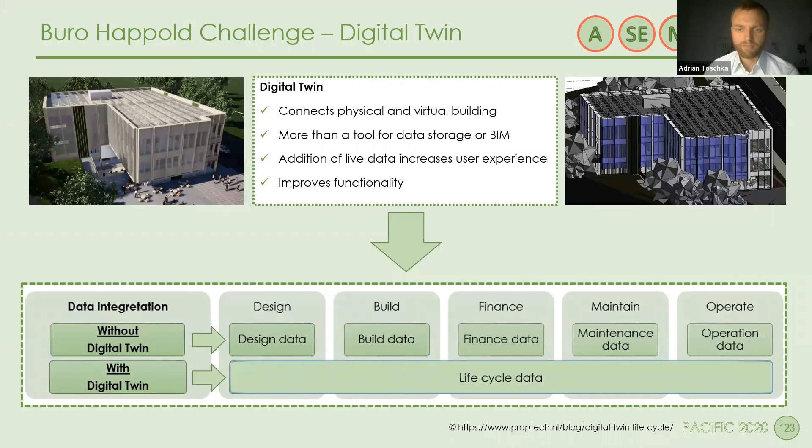The boxes at the bottom show the full potential of the digital twin. Rather than having all data stored and analyzed in silos, it can combine them into a life cycle data set. The videos show the benefits of the digital twin during the operation phase in case of an earthquake. So here, San Francisco is shaking. We are starting with the very unlikely happening of an earthquake.

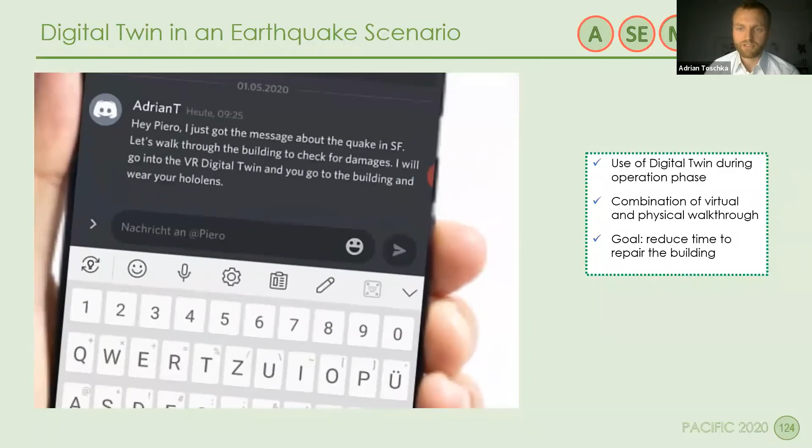I, as the LCFM of the building, who is currently in Germany, get a message on my smartphone about the earthquake. With Piero, who lives in San Francisco, I schedule a walkthrough in the building to check for damages. While I use my VR headset to be in the virtual model, Piero is wearing the HoloLens in the physical building. So we start a walkthrough while I'm sitting in my German office.

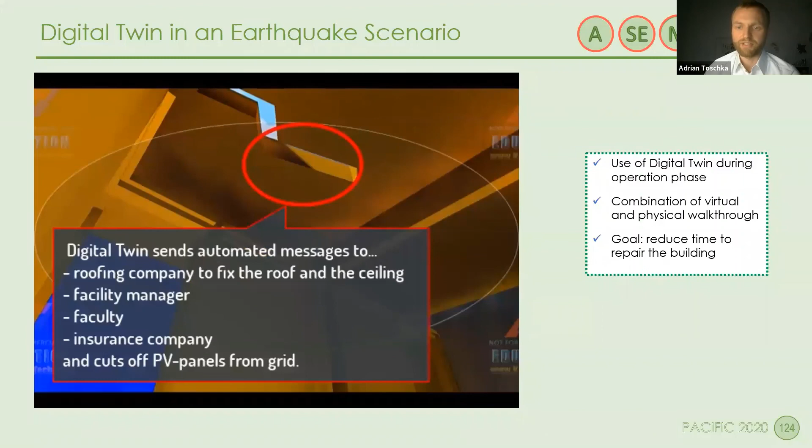We first check the atrium and some rooms, and then in one room, we detect a crack in the ceiling and roof. Here the full potential of the digital twin emerges. By comparing the physical building to the virtual model, the damage is noticed automatically, so the digital twin can send automated messages to the roofing company, facility manager, faculty, and insurance agent to inform them about the damage. Also, the PV panels are automatically cut off from the grid as we have not been on the roof yet.

Just as we want to continue, a message from the health monitor of the building pops up in the HoloLens, which shows the status of the fuses from the rocking walls. And there are obviously some problems, so we start to check them as well. Arriving at the first fuse, we recognize that the red light already indicates a problem. By coming closer to the fuse, we detect that it is deformed due to the earthquake. And again, the digital twin recognizes the damage and automatically orders the construction company to fix the damage.

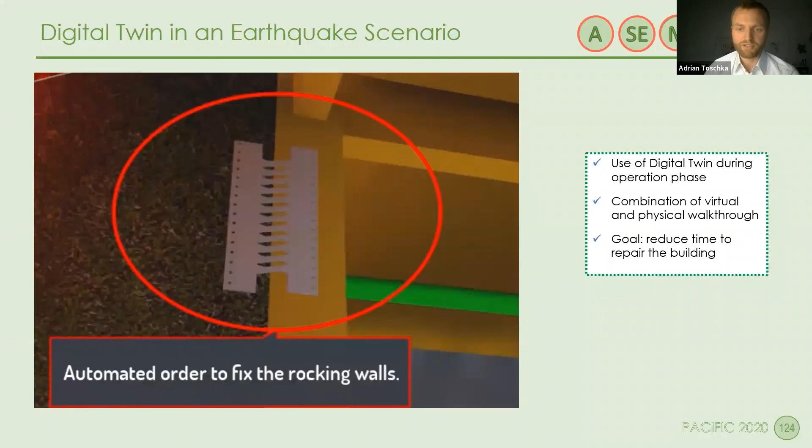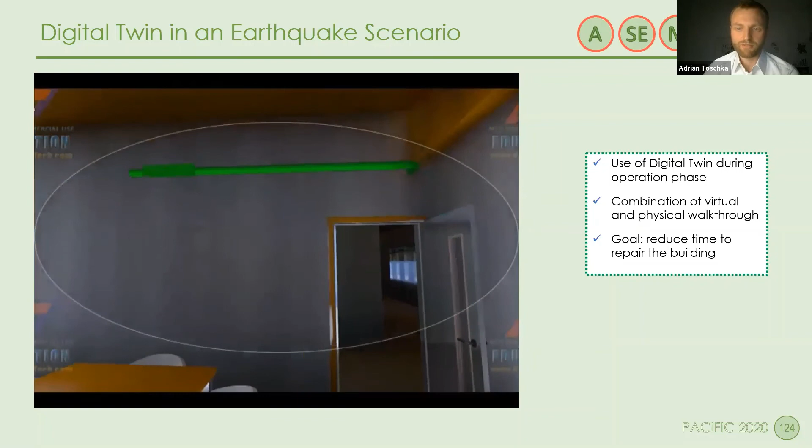So just remember, I'm still sitting in my German office and could solve these problems in a day rather than a few weeks. A week later, we again do a walkthrough with the same setting. Buro starts with his HoloLens. We first go and check the crack in the ceiling and roof, which is repaired. Afterwards, we check the fuse. Here, green light shows that everything is all right because the fuse is not deformed any longer.

And to be honest, we cannot really believe that we've already come to the end of AEC Global Teamwork Edition. Surprising for us how quickly this couple of months passed by and how much we've learned during this time. Not only did we polish our skills in our disciplines, but we've broadened our horizons. We've learned, listened, and asked questions. Sometimes we've brainstormed without results, and at times had too many ideas at once. But eventually, we've created a global project which wouldn't be possible without any of us.

It couldn't exist without enormous help from mentors and owners. We would like to thank especially Renate for truly being a super owner and super mentor. Thank you, our owners, for spending time with us late Sundays and co-creating the ideas for the building. Thank you, mentors, for being patient with us and answering our questions and teaching us.